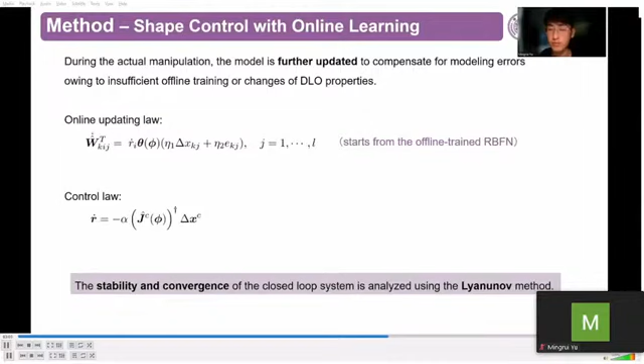We build both 2D and 3D simulation environments. The offline model is trained using only simulation data. First, we compare our Jacobian model with FKM. We test their offline model accuracy on a certain DLO. The results show that our model can achieve more accurate predictions with less training data.

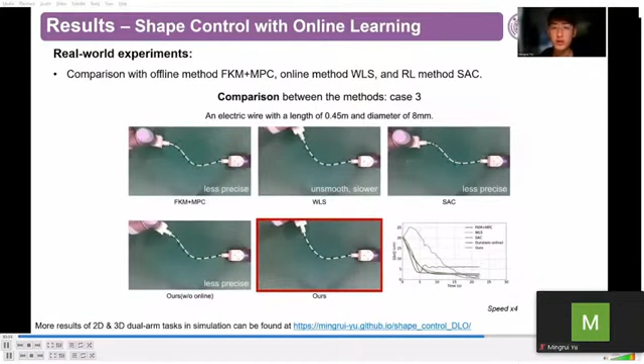We also validate the proposed relative state input. The results show that it can enable the offline model to have better generalization ability on new DLO. Here we show some shape control results in the real world. It has shown that our method can achieve better shape control results than the previous works.

Here are more cases accomplished using our method. In summary, our method is more stable and more precise. In conclusion, we propose a new scheme for shape control of DLOs, combining both offline and online model learning. We conduct both simulation and real-world experiments to show the superiority of our method.

Recently, we have just submitted a journal version of this work, in which we propose new model modifications and training strategies, a new optimization-based controller, a new robust online model updating law, and more detailed simulations and experiments such as dual-arm 2D shape control, dual-arm 3D shape control, some potential application cases, and a demo for obstacle avoidance. That's all, thanks for listening.

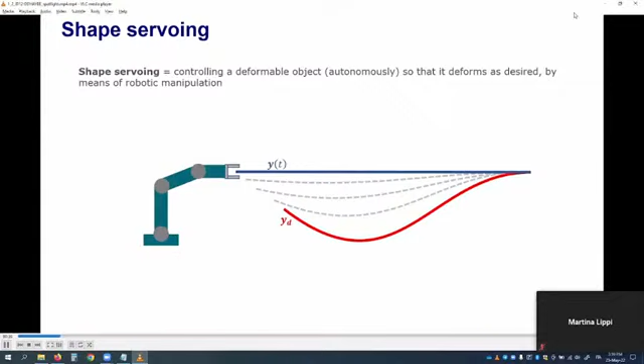In the literature, there are model-based and model-free approaches. Model-free ones operate in closed loop. The desired shape is given as input and is compared to the current shape of the object. With this, we obtain a shape error that the control law transforms into robot commands.

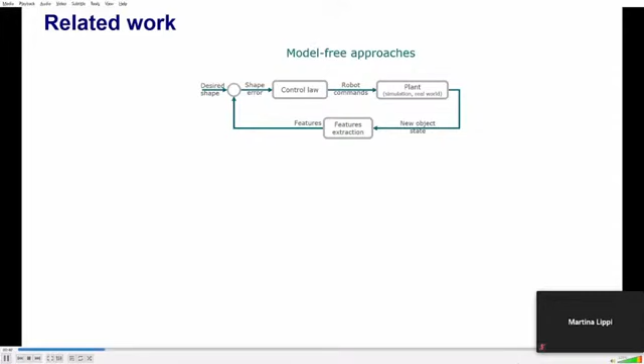Once these commands are executed, we obtain a new shape of the object from which we extract features of interest to close the loop. Different solutions have been developed for this, but a very interesting one is to use position of points in space, since this provides a direct way to define the target from the task objective.

In this approach, that I will call position-based servoing, the features in the control loop are defined by the three components of points on the object. We note them Y and their desired position YD. Moreover, independent grippers grasp the object rigidly and their pose is noted Z.

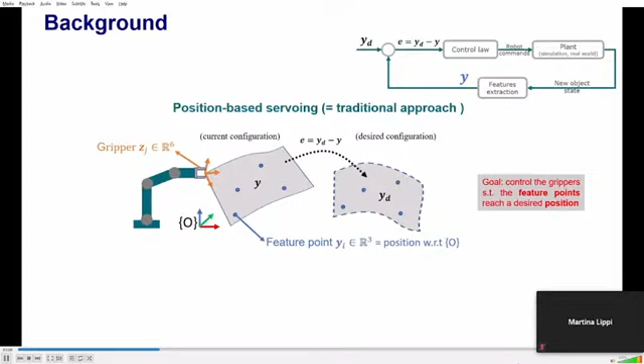Then, if the system is quasi-static, we can linearize around the current configuration to obtain a relation where a Jacobian relates gripper motions to feature motions. This matrix is called the shape Jacobian, and estimating it correctly is a key ingredient of the approach.

To estimate J, what we have at disposal is a history of pairs delta Z and delta Y. Several techniques can be used, and in this work we choose to illustrate with the Broyden update rule, but we emphasize that our method is not tied to this rule.

What is important to note here is that delta Y and delta Z used in the update are defined with respect to an inertial frame, so that the shape Jacobian depends on this choice and is not independent of rigid body rotations. Once J has been estimated, we can use its pseudo-inverse and the shape error to obtain gripper commands.

Usually, this error incorporates only the position error of the feature points. In our SE3-based approach, instead of using points as features, we propose to use mobile frames defined from the surface of the deformable object. The goal is now to control the grippers such that the feature frames reach a desired pose. This pose incorporates the position of the frame, but also a rotation matrix defining its orientation.

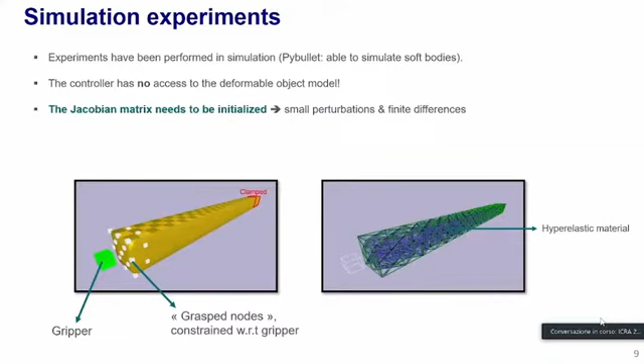Again, we simply invert the model to obtain gripper motions, and we update them with either position or velocity control. To illustrate the results, we have made several experiments in the simulator. The controller has no access to the object model, and we initialize the Jacobian with small perturbations and finite differences.

In the traditional approach, called here position-based servoing, we use 3 points shown in green here, and we use the same points to build the frame HP in our new approach. For small deformations, we observe that both methods work.

However, the advantage of SE3-based servoing is more visible for high deformation tasks. Here, coupling position and rotation in the error avoids twists, because it deteriorates the rotational part of the error. The trajectory we obtain is smoother and more straightforward. In contrast, for these two tasks, the traditional approach failed.

Finally, when we subject the beam to rigid body rotation, we observe that in position servoing, the components of the Jacobian vary non-linearly, while in our approach it remains constant, which should be the case, since the shape Jacobian should only capture shape variations.

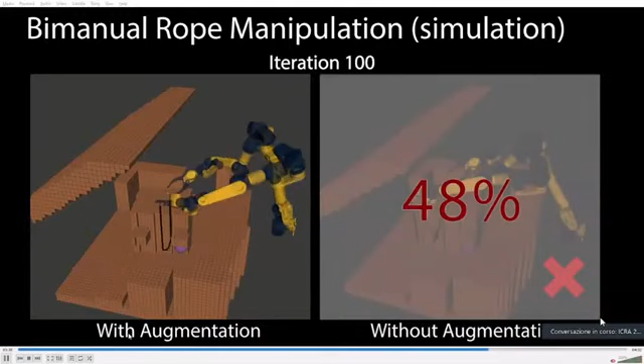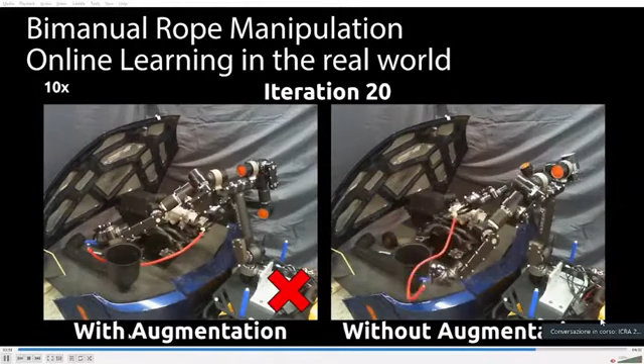We also evaluated on bimanual rope manipulation in the real world. The scene here is a mock-up of a car engine bay, and the robot has to move the middle of the rope under the engine without snagging, to set up for lifting the engine. Here we used CDCPD2 to track the rope state with two Kinect 3D cameras. We ran 30 iterations of learning and then froze the models for evaluation.

The evaluation found that without augmentation, it succeeded in 7 out of 26 trials, and with augmentation, it succeeded in 13 out of 26 trials.

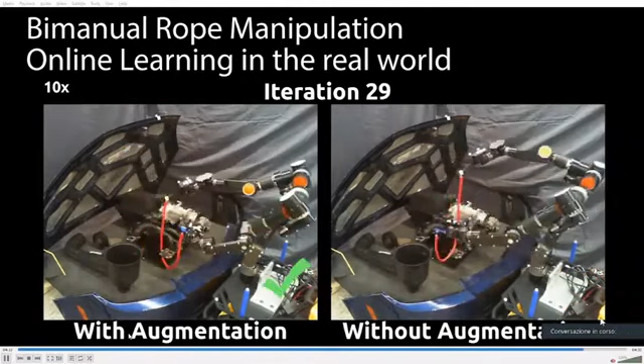In summary, we propose a novel method for data augmentation for robotic manipulation. We formulate augmentation as an optimization problem, and we show that it improves performance on downstream tasks in the low data regime. Thank you.

Yeah, so any questions? Yeah. Very nice work. Can you say something about the failure modes with augmentation? Can you repeat the question?

Yeah, so the question was, what are the failure modes specifically with augmentation? So one way in which things could go wrong is you could produce augmentations that are invalid or irrelevant or just not diverse enough. This is probably most likely to happen when some of our assumptions don't hold. So let's say that the rigid body transformations don't preserve internal forces for some reason, maybe gravity has a really strong effect or something like that. In that case, you might produce data that is not accurate to the real task or not relevant, in which case it wouldn't help.

What I'm getting is you have 13 out of 26. Correct? Oh, I see.

I think honestly, in this case, it's just that the amount of data is still, even with augmentation, small, and the task is really difficult. So while the augmentation helps, in order to succeed at this task 100% of the time, you'd probably need more than just 30 trials and more than just data augmentation. You need better control, better sensing, etc.

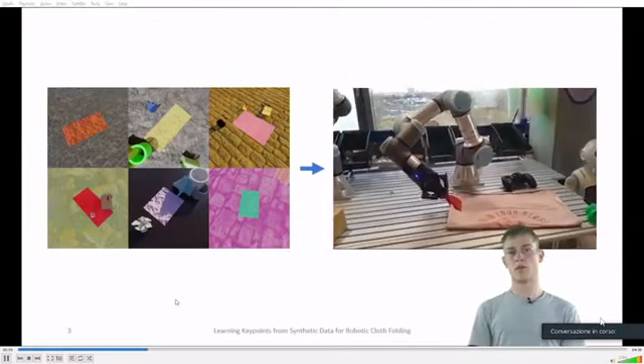By using procedural data generation, we can train this network without having to collect large datasets. We can also easily generate all desired variations in the dataset. Our pipeline contains three components: the procedural data generation, the key point detector, and the scripted fold trajectory. I will briefly introduce them in the next slides.

To generate the training data for the key point detector, we create a 3D scene in Blender. We randomize the geometry and pose of the towel, as well as its material. For the towel material, we create a simple noise texture, as creating high-fidelity textures of cloth is time-consuming. The camera position is also randomized to make the network generalize to different camera poses.

The major issue when training neural networks on synthetic data is the sim-to-real gap, or the decreased performance when transferring the network to the real world. To overcome this, we use domain randomization.

We sample objects from the Thingy10K dataset to provide negative distractors. To introduce diverse lighting, we add high dynamic range images as environment maps. Finally, we add a random material to the surface to introduce spatial patterns.

For the key point detector, we use a UNet-inspired architecture with residual connections in the bottleneck to combine spatial resolution conserving paths with a downsampling path for a larger receptive field. The network outputs a single heat map that contains all detected corners of the towel. After training on the synthetic dataset, the network achieves an average precision of 82%.

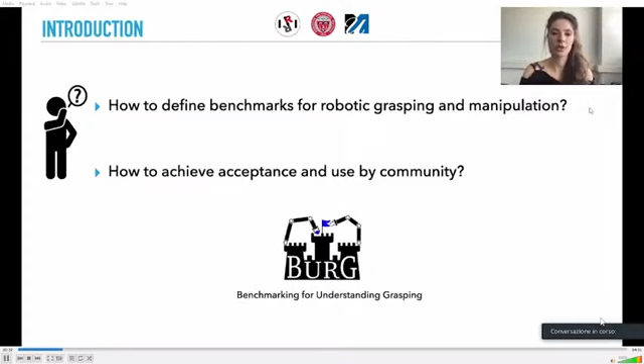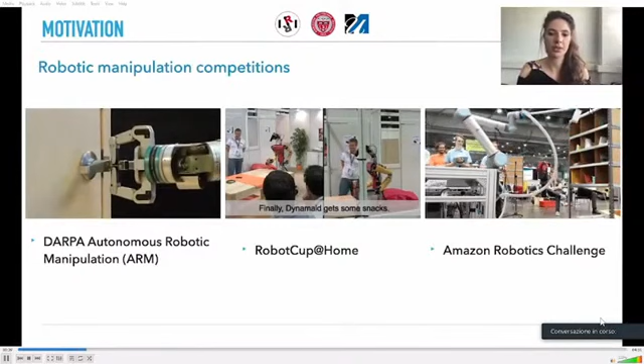Hi everyone, I'm Irene Garcia-Camacho and I will present the cloth manipulation and perception competition. Establishing well-defined benchmarks that serve to evaluate different robotic manipulations is still a pending challenge in robotics. Several initiatives have been proposed in recent years, but a benchmark is successful only when it is widely accepted and used by the community. For this reason, during the last years several competitions in robotic manipulation have been organized to drive scientific progress in the field, as they enable comparison of different approaches with equal test conditions. One of them is the robotic grasping and manipulation competition, which includes three tracks.

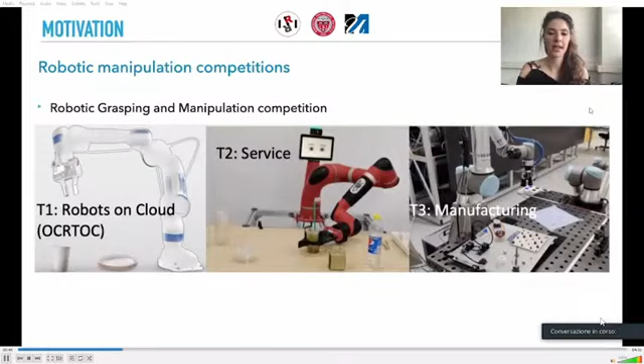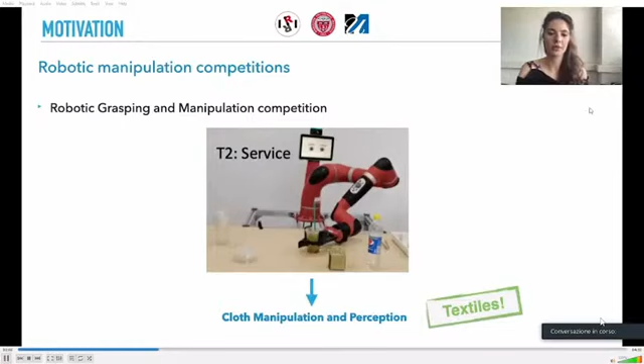Previous competitions have mainly consisted of rigid object manipulation, leaving behind the challenges of grasping and manipulating deformable objects. For this reason, we created a new competition, held as part of this track at ICRA 2022, which consists of perception and manipulation tasks involving highly deformable objects such as textiles. This competition is the first proposal to bring together researchers solving the same tasks in cloth manipulation, comparing different solutions under equal conditions.

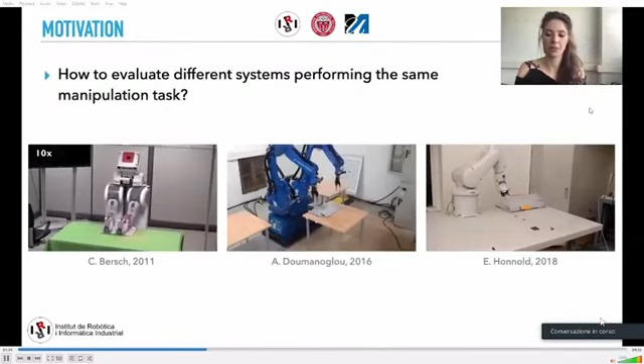This comparison is currently quite difficult to do with published works, as they use completely different metrics and different types of objects. Another motivation of this competition is to increase the acceptance and use of the household cloth object set, which was designed as a first step towards benchmarking cloth manipulation through standardization of textile objects, similar to what was done with the YCB object set. This set will be distributed to participants to perform the tasks of the competition, and they will be able to keep it afterward to continue working with it.

This competition consists of a small set of tasks based on current challenges in two important areas of research in deformable objects: perception and manipulation. We selected three tasks that include problems already tackled in literature, but that still require effort to be considered solved.

The first task focuses on the main perception skills necessary for grasping a textile object. It will evaluate the ability to detect relevant features and select suitable grasping points according to the cloth configuration. This configuration is very important in manipulation, as it determines the possible grasps in order to manipulate it as desired.

The other two tasks consist of implementing two of the most studied cloth manipulation tasks in literature. On one hand, the unfolding task consists of grasping a cloth and manipulating it until it is placed flat on the table. This task is considered successful when the cloth is laid flat and completely inside the table. We will also evaluate the quality of the placement by measuring the resulting area and computing the error.

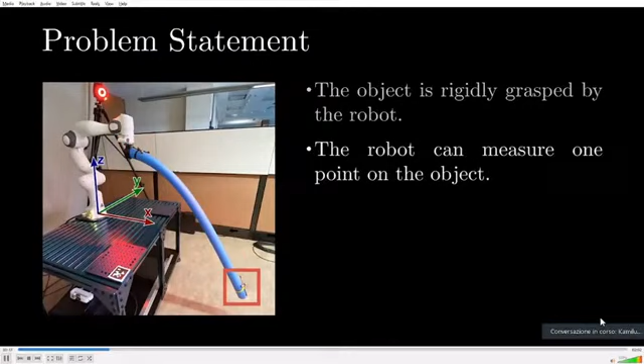We study a dynamic deformable manipulation task. We assume that the robot has already grasped the deformable object, and that the robot can accurately measure the 3D position of a single point on the object. Our benchmark task is to track a fast-moving trajectory with the measured point.

The true state of a deformable object is continuous, infinite dimensional, and governed by complex dynamics. Furthermore, the system is only partially observable. We cannot measure the full continuous state from the real world, only the controls U and observations Y.

We learn an input-output dynamics model from real-world data using a recurrent neural network, which has an uninterpretable hidden state, X. The recurrent network forms a discrete time dynamical system, so we can use standard nonlinear state estimation techniques to estimate a value of the uninterpretable state that is consistent with past inputs and outputs.

In our protocol, we first interact with the object to build a dataset, which we then use to train the recurrent network. We estimate the recurrent network state from past inputs and outputs using an extended Kalman filter. We then use the mean of the Kalman filter belief distribution as the initial state for the dynamics rollouts in a nonlinear model predictive controller.

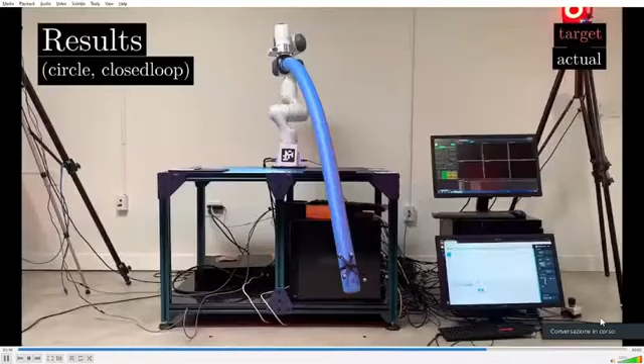The controller sets end effector, pitch, and yaw angles for the robot. The Kalman filter consumes inputs from the controller and measurements of a single point from a motion capture system. We test our method on a robot arm grasping a foam cylinder. This video shows the tracking performance for a circular trajectory.

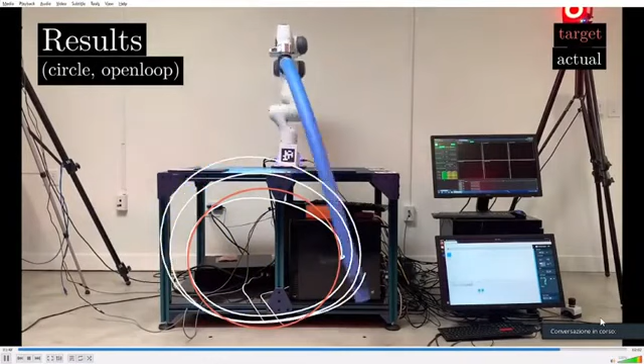We also perform an ablation study where we remove the Kalman filter component. This results in an open-loop system with no opportunity to use observations to correct for modeling error in the recurrent network dynamics. The open-loop system shows degraded tracking performance. More details and the results for other trajectories are available in our paper.

Any question? Oh, you're on. So there are no questions in the room. Martina, do we have some online? We lost just the Wi-Fi, so we don't have access. We do have one question in the room in the back.

What's the motivation of this? Can you repeat the question? The question is, what's the motivation of this work? I think it's a great question.

One of the initial motivations is trying to govern objects that are dominated by passive dynamics in highly dynamical tasks. Another initial motivation, which comes from a funding source, is manipulation in space. If you have a very low power space actuator—oftentimes you ship something up to the International Space Station that has very low actuator potential—you're manipulating maybe a cargo bag, and you have very low actuation compared to the actual passive dynamics of the object. The test bed on Earth here is basically some task where these passive deformable dynamics really dominate. That's why we tried to make the tracking task as fast as possible. Thanks, it's a great question.